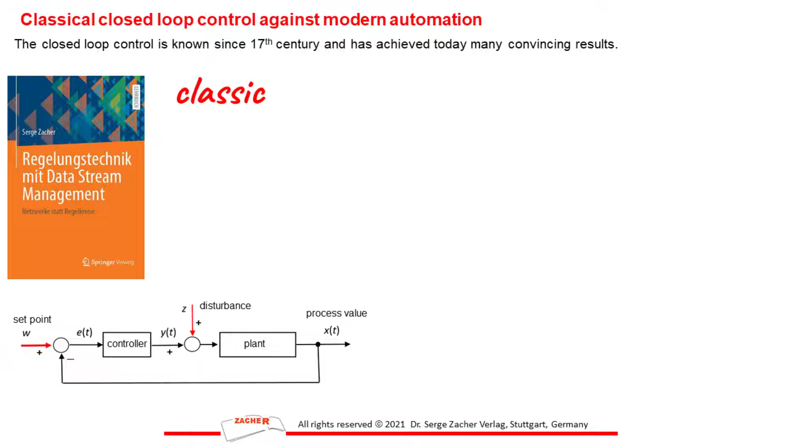Hello. Here is the presentation of Dr. Zacher. Dr. Zacher presents the new revolutionary concept of the closed-loop control, which is called data stream management. The closed-loop control was first proposed in the 17th century and since then has achieved many convincing great results. But its actual state differs from today's automation. The main differences are shown in the book of Dr. Zacher.

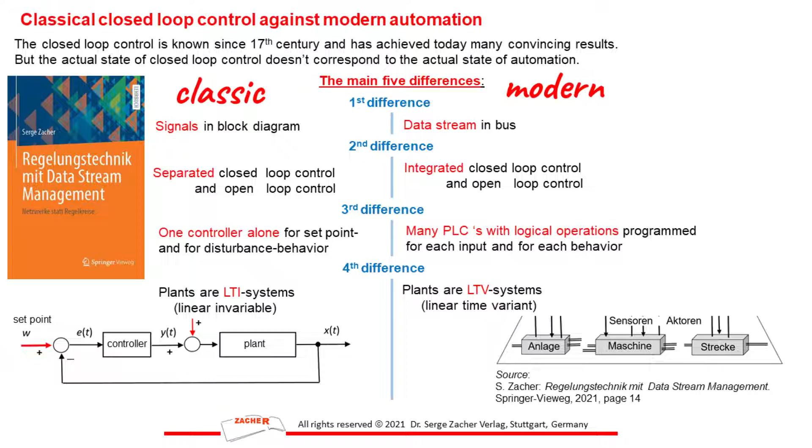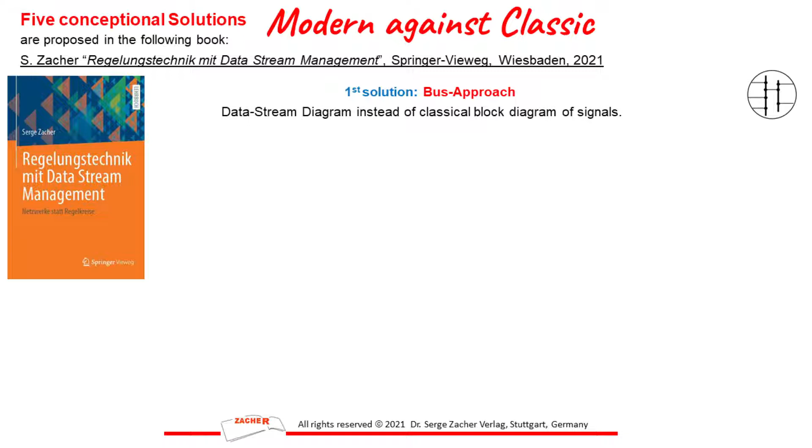Modern against classic. Is it possible to describe the closed loop with modern automation tools? The answer is given in the book of Dr. Zacher. The first concept is the bus approach. The second concept is called data stream management. The third concept is called climb and hold. According to this concept, not the controller alone will be used for all kinds of closed-loop behavior. The data stream manager will control the loop.

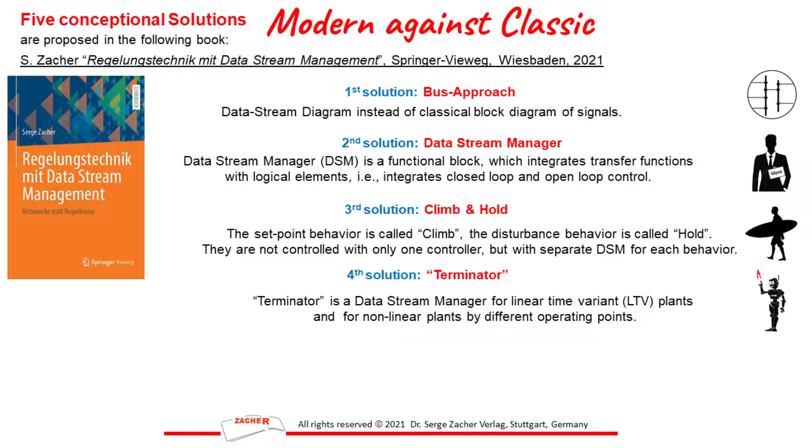The fourth concept is the Terminator. It is a new tool, a wonderful, universal and magic tool. Finally, there is the Antisystem approach, which could be used not only for feedback, but for the wide range of dynamic systems. It was the overview. Now we will show you all 5 solutions one after another. We begin with the bus approach.

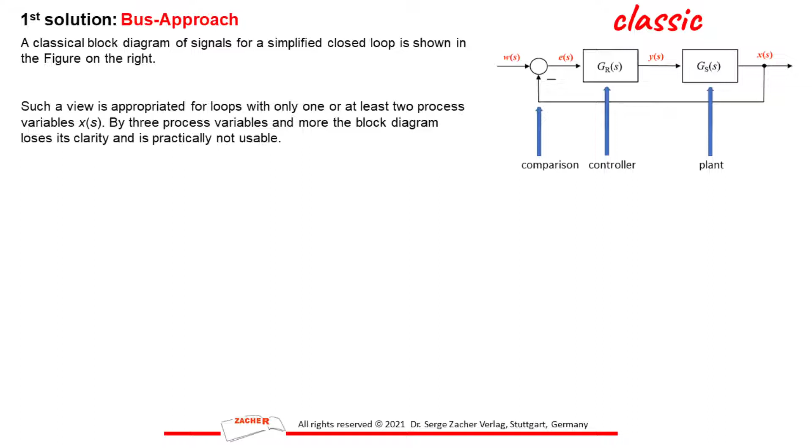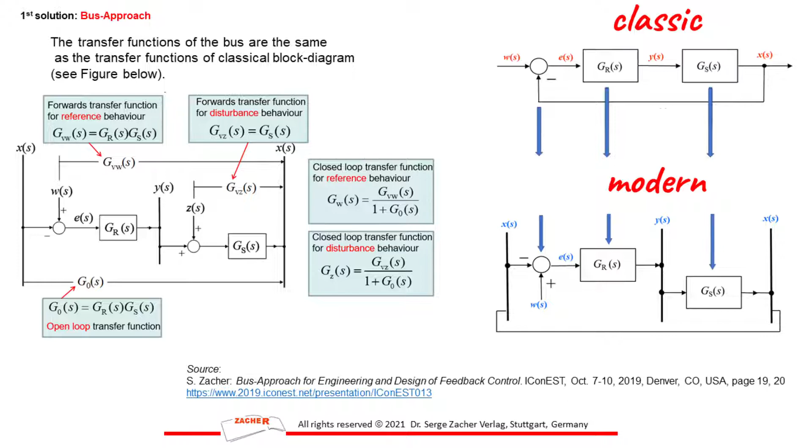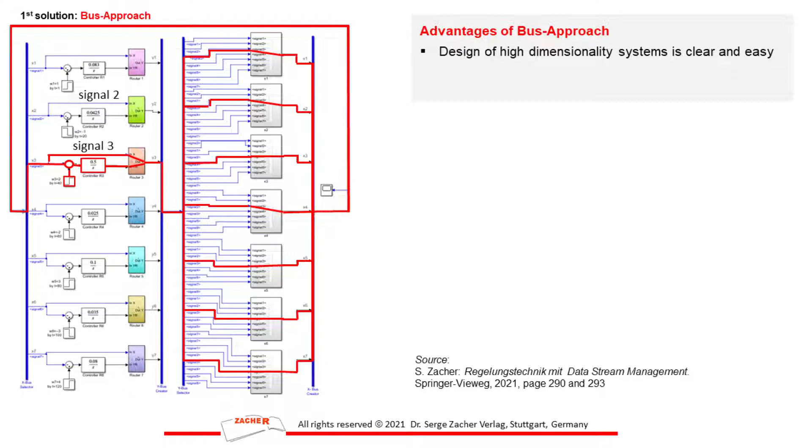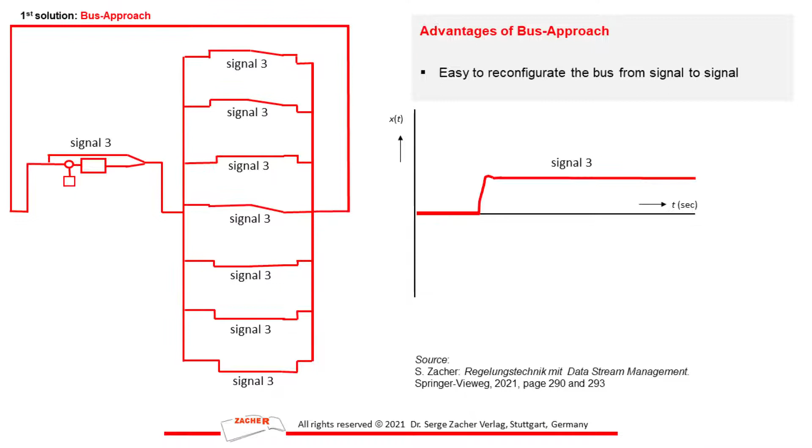Your attention please. A very important feature of the bus approach is that the mathematical description is the same as of the classical loop. The bus approach has more advantages against the classical loop. The design of high-dimensionality systems is clear and easy. With the bus approach, it is easy to reconfigure the bus from signal to signal, as it is shown by an example of 2 signals. Modern against classic.

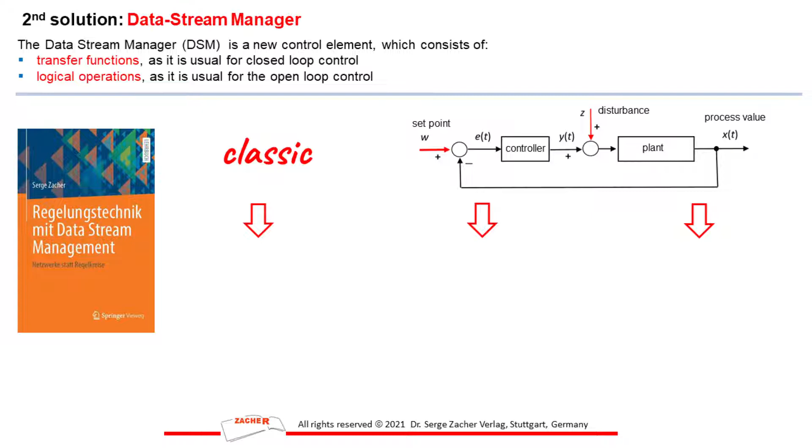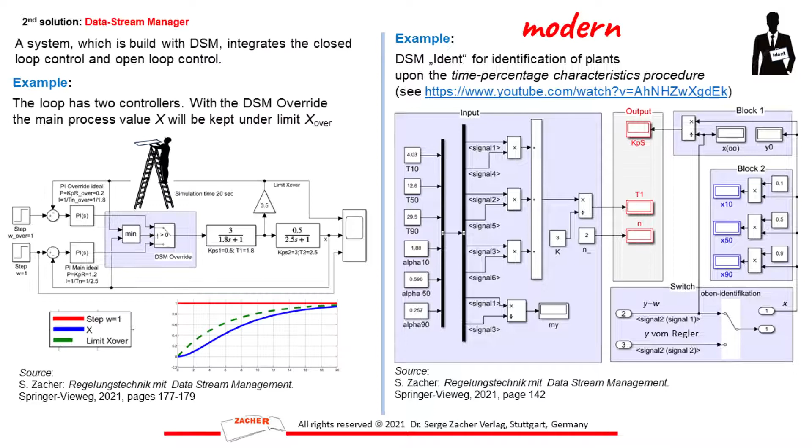The data stream manager, combined with the bus approach, is a new, revolutionary concept of the closed-loop control theory. Data stream managers are a kind of software agents, which are widely known in informatics. But a data stream manager consists not only of programmed logical operations, but also of usual transfer functions. Here are shown only 2 examples of data stream manager, the override manager and the ident manager. Modern against classic.

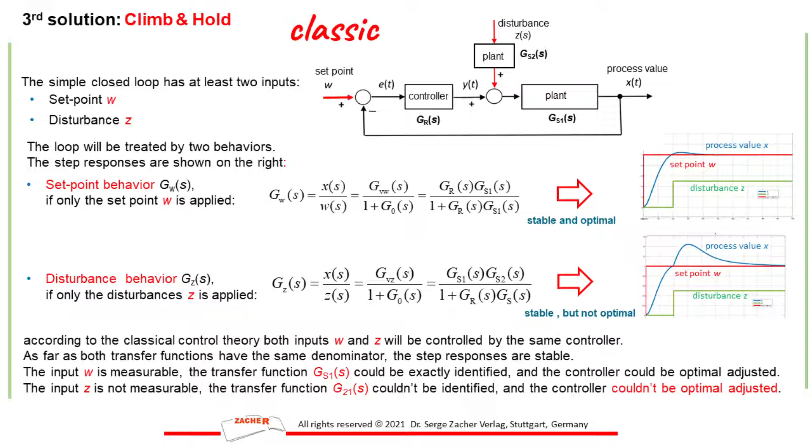Each student who has studied the basics of feedback control knows that a closed loop has 2 kinds of behavior: the set point behavior and the disturbance behavior, which are controlled from one controller alone. As far as a controller is adjusted optimally for set point behavior, it cannot be optimal for disturbance behavior. The idea of this solution, which is called climb and hold, is to change the point of view and to control each behavior not with only one block, but with its own block.

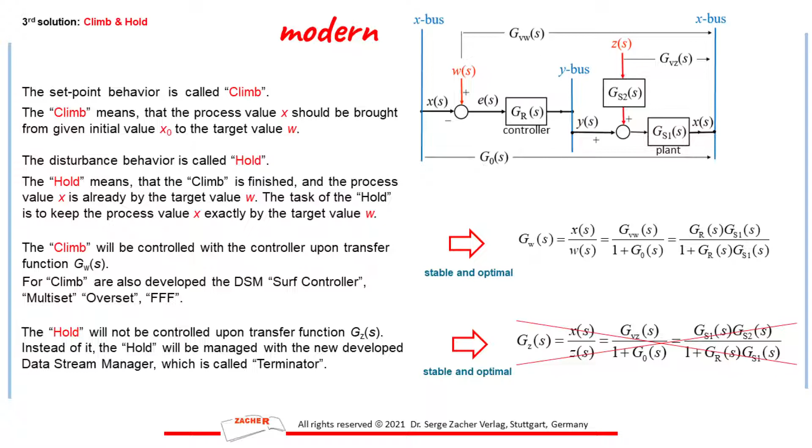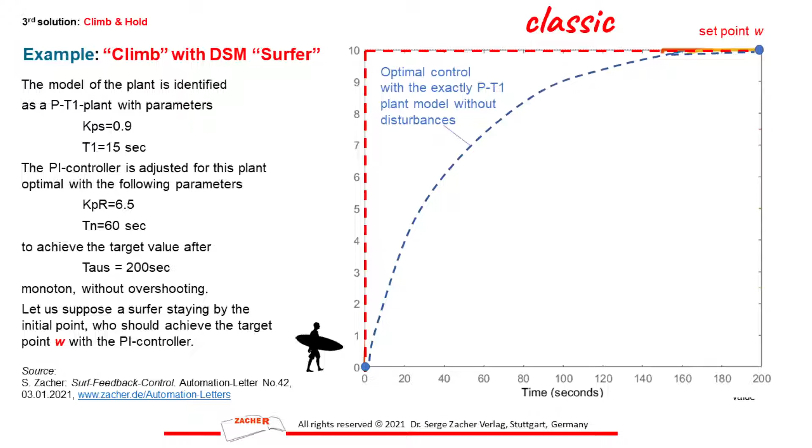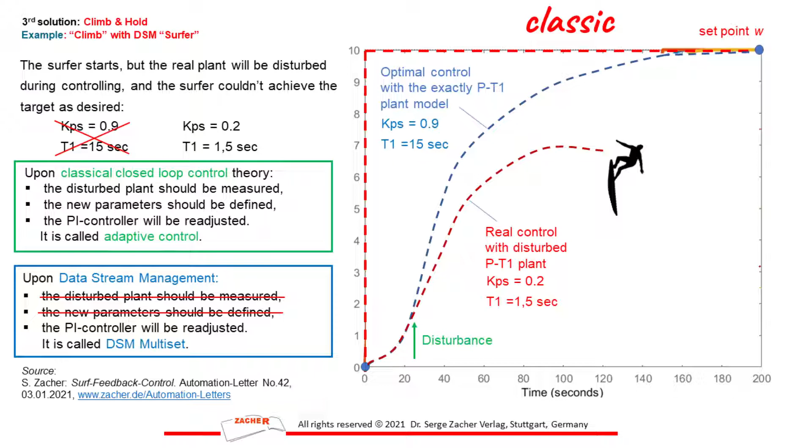A data stream manager surfer is developed for the climb. What does a real surfer need? The answer is, he needs many small waves. If there is only one wave, then the controller is fixed for this wave. But what happens, supposing the wave's parameters change during control? The surfer will not achieve his target or will achieve it not optimally. Another situation is if there are many small waves. You can follow yourself how the surfer moves from the initial point to the target when there is not only one set point step, but many small steps.

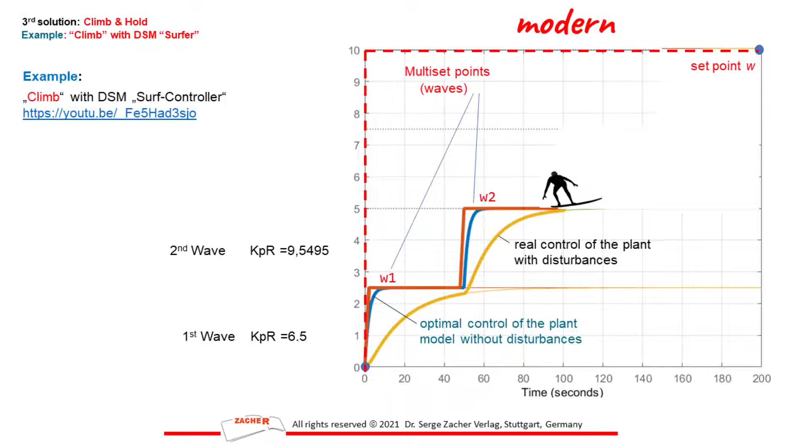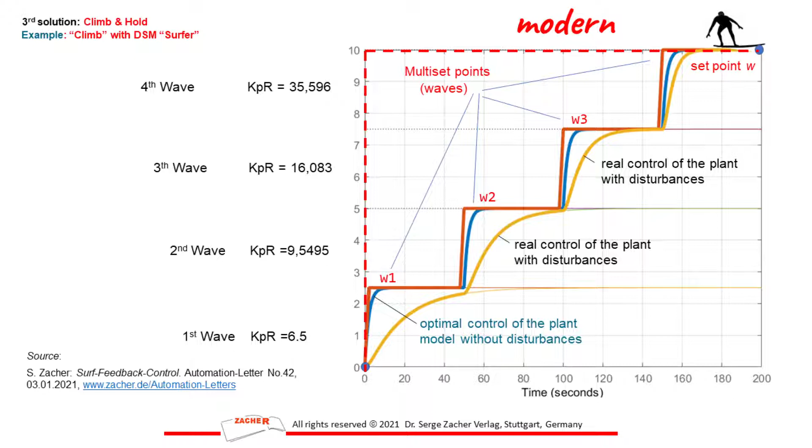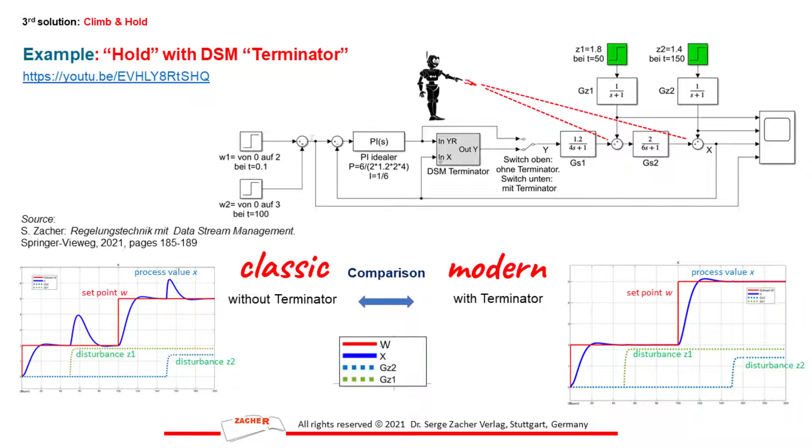A data stream manager Terminator is developed for the hold. The Terminator practically fully destroys any disturbance, independently of the place where the disturbance is applied. The use of both managers, the surfer and the Terminator, leads to significant results, which were not known before in the control of closed loops.

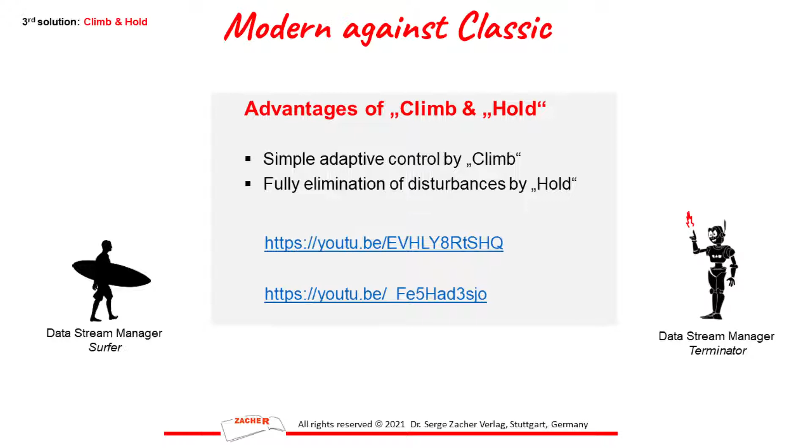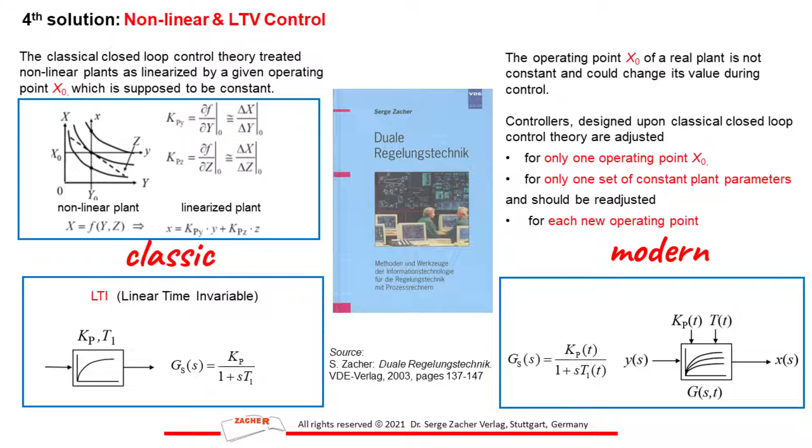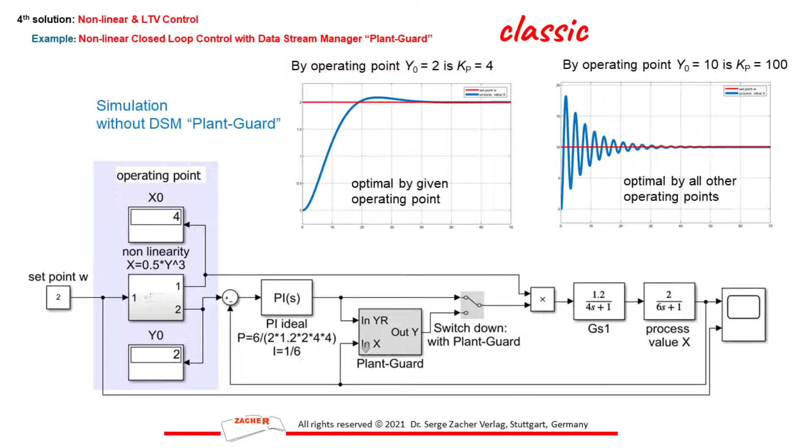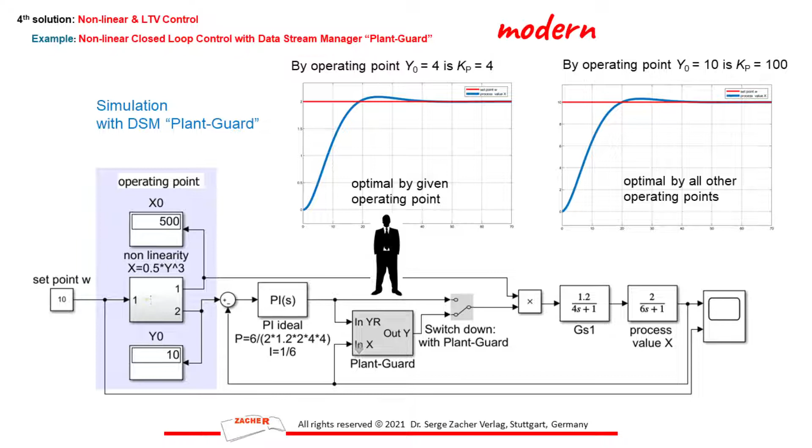The same data stream manager Terminator could be modified a little and could be used for plants with changeable parameters and for nonlinear plants with different operating points. That's why the Terminator is called Plant Bodyguard. The data stream manager Plant Guard doesn't allow any changes of the plant to influence the control. The Terminator and the Plant Guard are so simply built and the results of their implementation are so convincing that one can only wonder why these data stream managers were not used many years before.

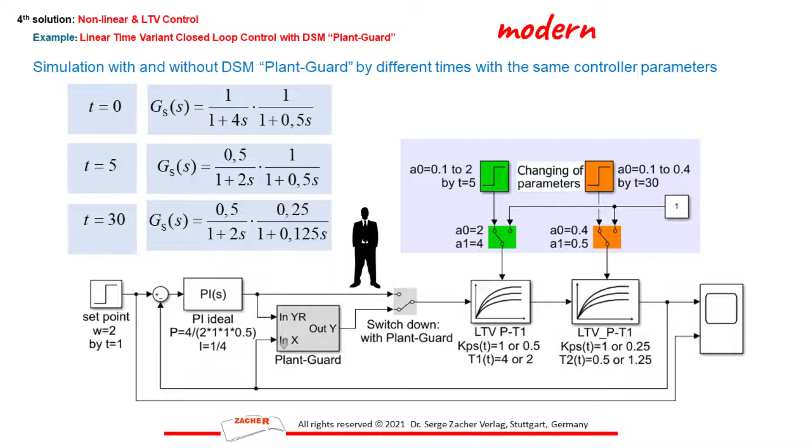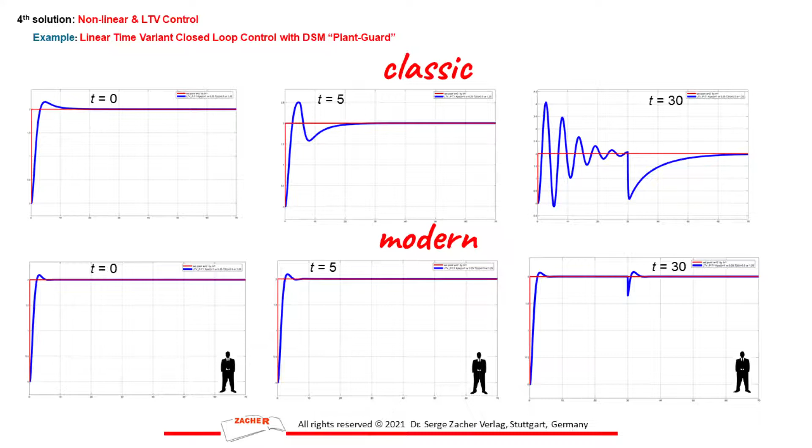Here is an example of a linear time variant plant with three sets of parameters at different times, at 0, 5 and 30 seconds. Note please that the step responses are the same, although the controller has all the time the same parameters, which is not possible with classical control. Modern against classic.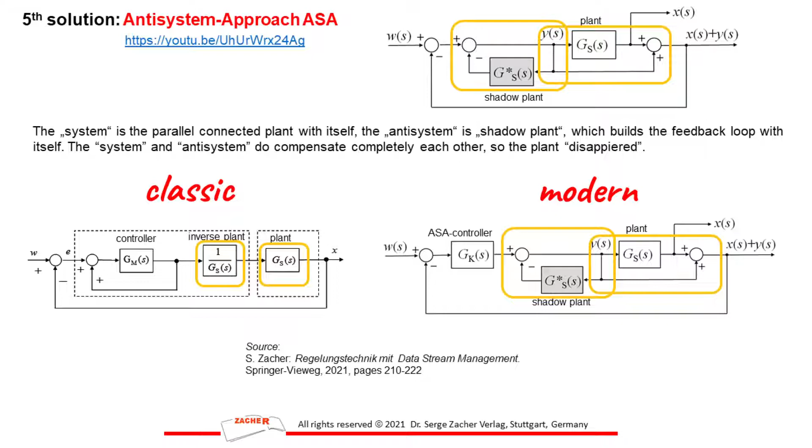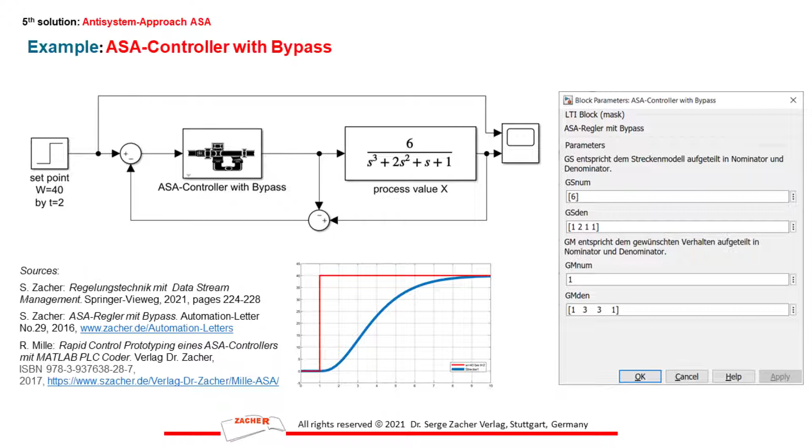Finally, we present you the antisystem approach. Dr. Zacher derived and verified that a system could be fully compensated with its antisystem without building an inverse of the original system. There are so many publications about the antisystem approach that we will only show you 2 examples. The first example is the acceleration of control with the Turbo Data Stream Manager. The second example is the optimization of control with the Bypass Data Stream Manager. Modern against classic.